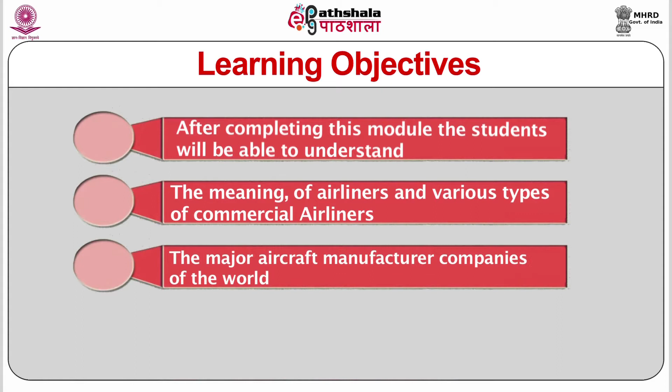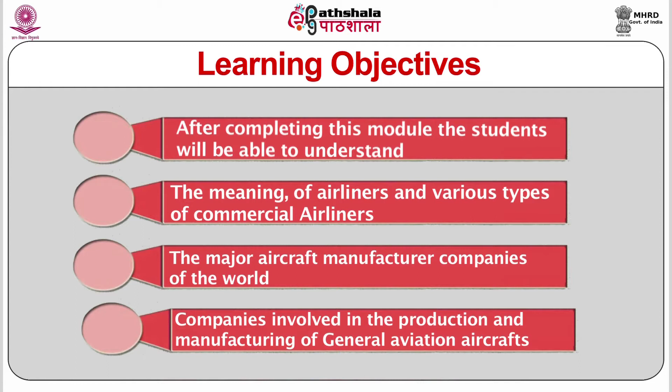Today we are going to discuss the module Major Aircraft Manufacturers under the paper Aviation Industry, Ticketing and Frontier Formalities. After completing this module, students will be able to understand the meaning of airliners and various types of commercial airliners. They will also understand the major aircraft manufacturer companies of the world, and come to know about companies involved in the production and manufacturing of general aviation aircrafts.

Dear students, with the advancement of technology and safety concerns, the design and making of aircrafts or airplanes have also been advanced. These changes may be because of changing aspirations and needs of customers, safety and security concerns, global competition, ever-changing technological landscape, or sustainability of individual airlines, which collectively contributed to the overall advancement of aircrafts in the aviation industry.

The present module will discuss and focus on the meaning and various types of airliners, different types of aircrafts, and the major aircraft manufacturer companies of the world. The module shall also briefly discuss the various companies involved in the production and manufacturing of general aviation aircrafts.

Let us first discuss the airliners. The airliners may be defined as the aircrafts or airplanes used to transfer air passengers and cargo, mostly operated by airline companies. The definition may vary from one country to another, but typically an airliner is defined as an aircraft which intends to transfer or carry numerous passengers and cargo in commercial service operated by an airline company. Let us now discuss the different types of airliners.

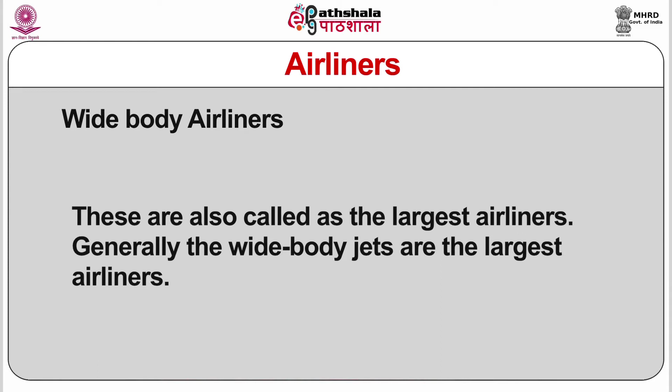There are 4 different types of airliners. The first is the wide body airliners, also called the largest airliners. Generally, wide body jets are the largest airliners. They are commonly called twin aisle aircrafts because they have 2 separate aisles running from the front to the back side of the passenger cabin.

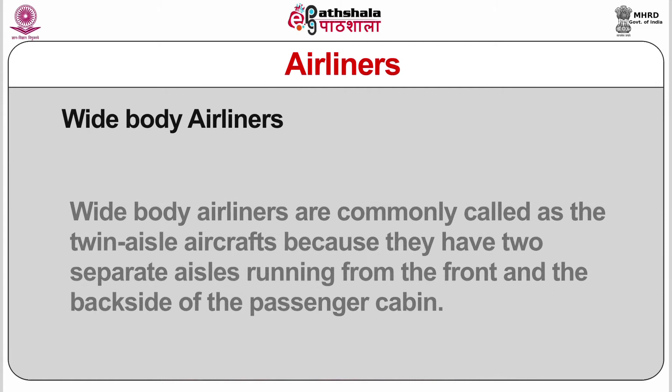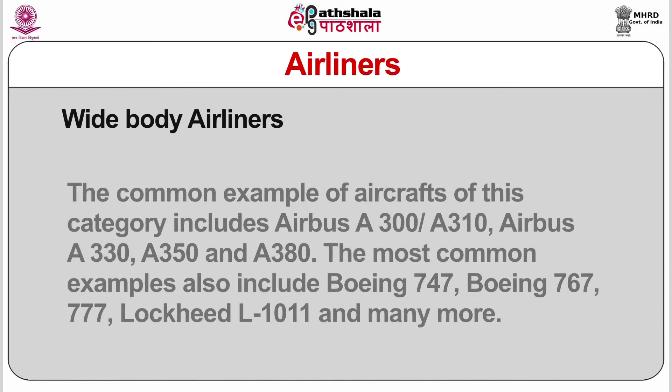Common examples of aircrafts in this category include Airbus A300, A310, Airbus A330, Airbus 350 and Airbus A380, along with Boeing 747, Boeing 767, 777, Lockheed L1011 and many more. Such aircrafts fly from major cities and are generally used for long haul flights where the time and distance of the flight is very long.

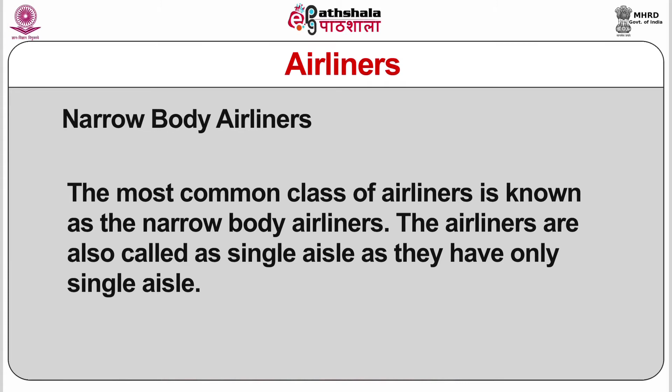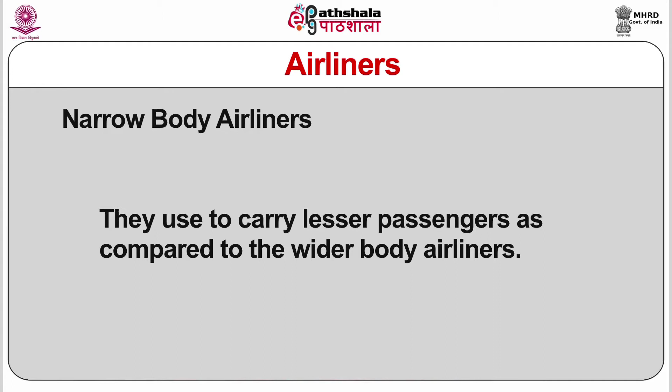The second one is the narrow body airliners, the most common class of airliners. These are also called single aisle aircrafts as they have only a single aisle. Such aircrafts are generally used for medium haul or medium distance range flights and carry lesser passengers compared to wide body airliners.

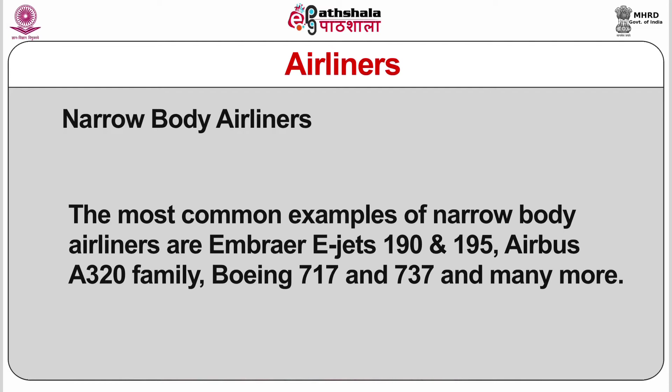Common examples of narrow body airliners are Embraer E-Jets 190 and 195, Airbus A320 family, Boeing 717 and Boeing 737 and many more. The future of narrow body airliners also embraces the Bombardier C series.

The next category is the regional, short haul and feeder line aircrafts. These may be defined as the non-mainline counterparts of the larger aircrafts operated by major airliners, to feed traffic into the larger airline hubs or cities. Such aircrafts have a lesser passenger capacity, maybe lesser than 100 passengers.

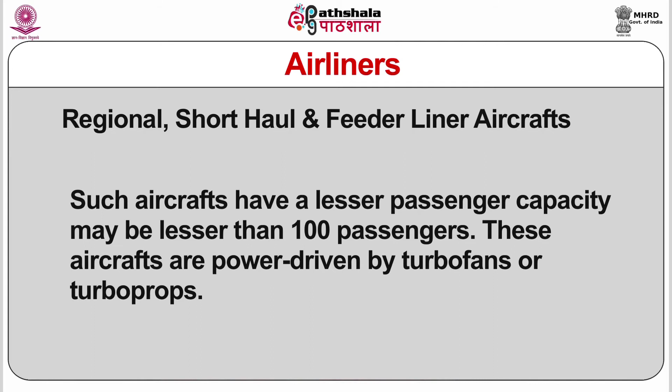These aircrafts are power driven by turbofans or turboprops, mainly used on particular routes to enhance frequency, need and service levels of consumers in the marketed product offered by larger airline companies. These feeder airliners are mostly contracted by larger airline carriers to provide services to passengers from smaller cities to the main hub or city and vice versa.

Sometimes the regional airliners are also painted in the liveries of the major airliners for which they are providing feeder services, in order to offer the market a smooth changeover between the smaller airlines and the larger airline. Some aircrafts used in this class are Bombardier CRJ and Embraer ERJ jets along with Bombardier Q-8 series.

The fourth category is commuter liners, used by regional airlines and air taxi operators. Commuter aircrafts are the lightest, used to carry maximum 19 or fewer passenger seats, and are called commuter or feeder aircrafts, commuter liners or feeder liners, or sometimes air taxis.

These may vary from country to country depending upon the size of the engines, their marketing in a particular region of the world, and their seating capacity. Because of different regional and national directives or policies, a commuter aircraft may not be able to qualify as an airliner in some countries.

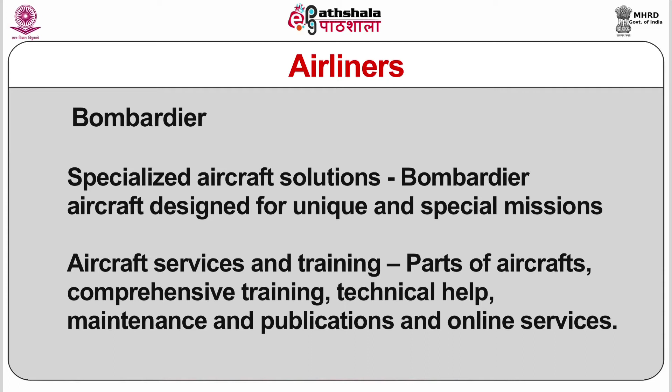The next one is jet travel solutions, which includes FlexJet. Then there is specialized aircraft solutions, which includes Bombardier aircraft designed for unique and special missions. The next one is aircraft services and training, which includes parts of aircrafts, comprehensive training, technical help, maintenance and publications and online services. Dear students, let us now discuss about Airbus.

Airbus was founded on 18 December 1970 by the name Airbus Industrie, and later in the year 2001 the name was changed to Airbus SAS. The founders of Airbus were Roger Béteille, Felix Kracht, Henri Ziegler and Franz Josef Strauss. The company is headquartered in the Blagnac region of France.

Airbus is a global company having worldwide operations and providing services related to manufacturing commercial airliners to most regions of the world. The parent company is Airbus Group, and the other subsidiaries are Airbus Corporate Jets, Airbus Operations SAS, Airbus ProSky and Stelia Aerospace. The company manufactures and produces mostly in France, Germany, Spain, China, United Kingdom and the United States.

Airbus started as an association for the production of aerospace and was named Airbus Industrie. Total people employed in this company are around 72,817. In the year 1999 and 2000, connection between European defense and aerospace companies led to the setting up of a simplified joint stock company by the end of the year 2001.

The European Aeronautic Defense and Space Company bought it up with a share of 80% and BAE Systems with a share of 20%. But on 13th October 2006, BAE sold its share to the European Aeronautic Defense and Space Company because of the process of protracted sales.

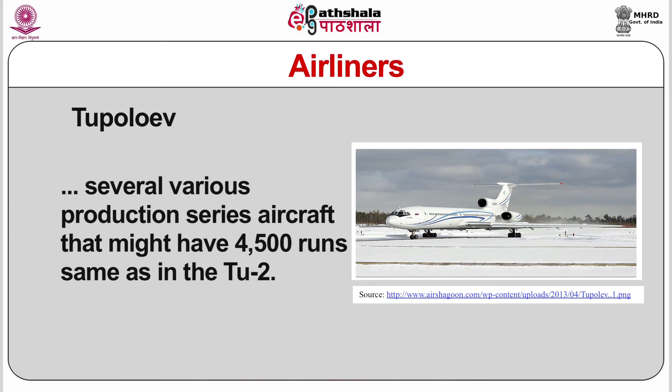Dear students, let us now discuss about Embraer. Ozires Silva founded Embraer on 19th August 1969. It mainly deals in the aerospace and defense sectors.

The company has several divisions, namely Embraer Defense and Security, Embraer Commercial Aviation, and Embraer Executive Jets. This company has become a main aircraft producer worldwide, focusing on particular market sections with favorable growth perspective in executive aviation, defense and commercial. The head office of Embraer is located in São José dos Campos, Brazil.

From the year 1996, more than 1,000 ERJs have been introduced by Embraer and delivered to more than 37 airlines from 24 different countries. There are three markets in which Embraer produced aircraft are used.

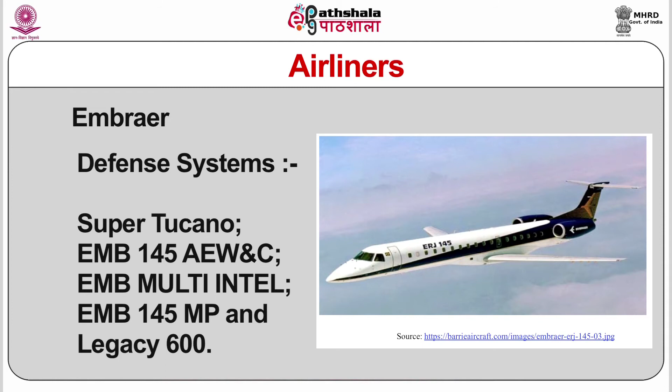The second category is defense systems, which includes Super Tucano EMB 145, AEW&C EMB Multi-Intel EMB 145 MP, and Legacy 600. The third category is executive aviation, which includes Lineage 1000, Legacy 600, Legacy 500, Legacy 450, Phenom 300 and Phenom 100 aircrafts.

Students, let us now discuss about Boeing. Boeing is an American-based public sector multinational corporation. It mainly deals in the aerospace and defense sectors. The founder of the company was William Boeing.

The company was founded on 15 July 1916 and was introduced as Pacific Aero Products Corporation, headquartered in Seattle, Washington, in the United States. The company is presently headquartered in the Chicago region of Illinois in the United States of America.

The company offers various other services like leasing and supporting solutions, and operates worldwide. The company has produced around 745 aircraft and 10 satellites till present.

In terms of products manufactured, the company has produced Boeing 737, Boeing 747, Boeing 767, Boeing 777, Boeing 787, Boeing FA-18E Super Hornet, Boeing CH-47 Chinook, and the Boeing 702 satellite family.

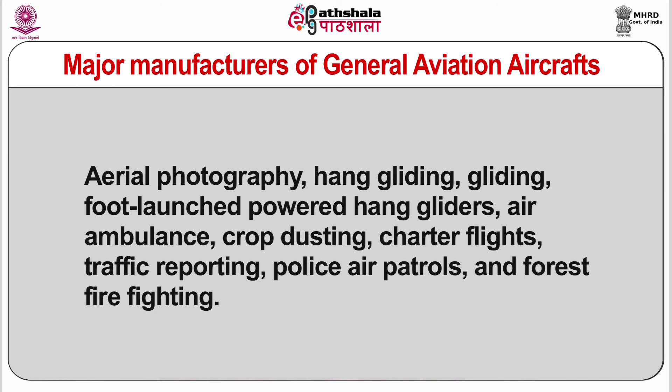The following small aircraft manufacturers are among a number of other manufacturers that serve the general aviation market, with a focus on private aviation and flight training.

The first one is the Cessna, the second one is Cirrus Design, the third one is the Diamond, then there is the Mooney, and the last one is the Piper.

Let us discuss the Cessna first. Students, the Cessna Aircraft Company is the leading designer and manufacturer of light and mid-size business jets, utility turboprops, and single-engine aircraft.

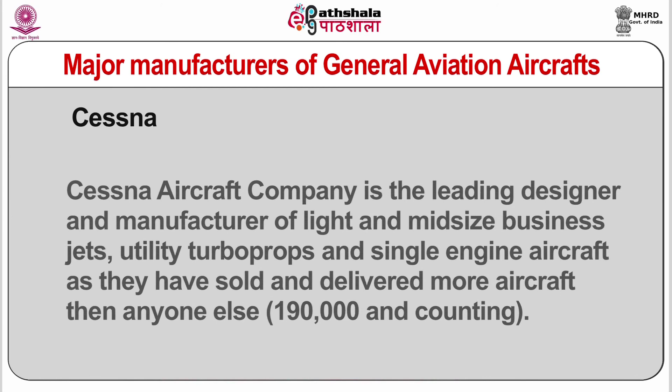They have sold and delivered more aircraft than anyone else. They started more than 8 decades ago as a small aircraft company in Wichita, Kansas, USA, with an aim to build a monoplane.

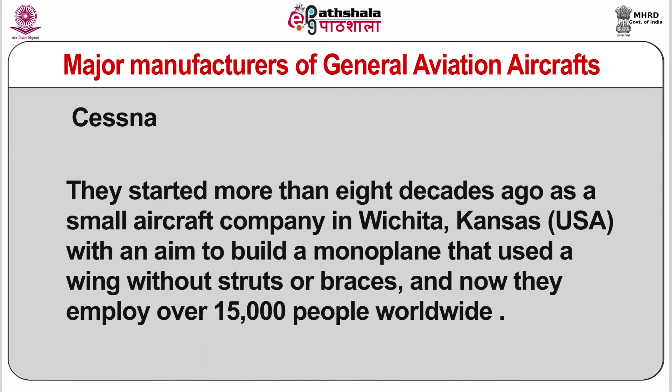The monoplane used a wing without struts or braces, and now they employ over 15,000 people worldwide. The company is a subsidiary of the United States conglomerate Textron.

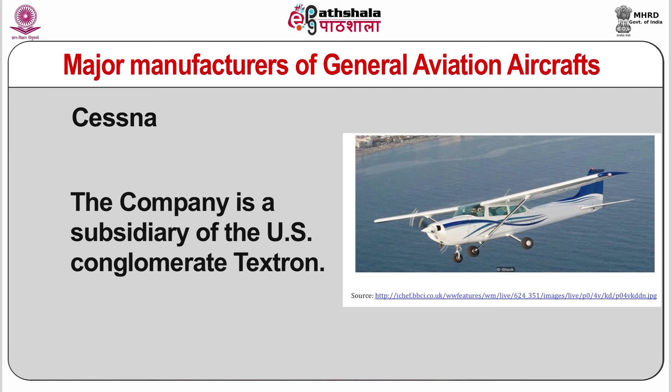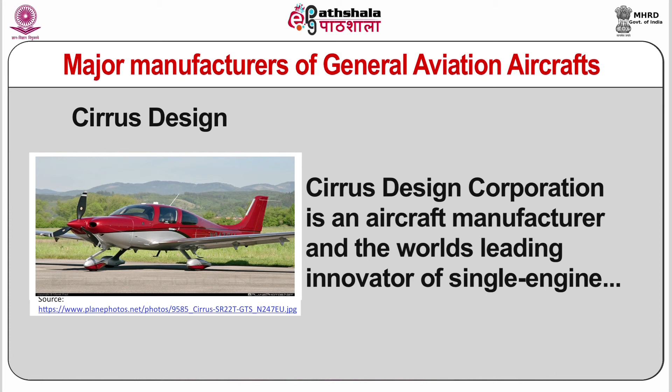The second one is Cirrus Design. Cirrus Design Corporation is an aircraft manufacturer and the world's leading innovator of single-engine piston-powered aircraft, with their SR-22 being the world's best-selling airplane in its class.

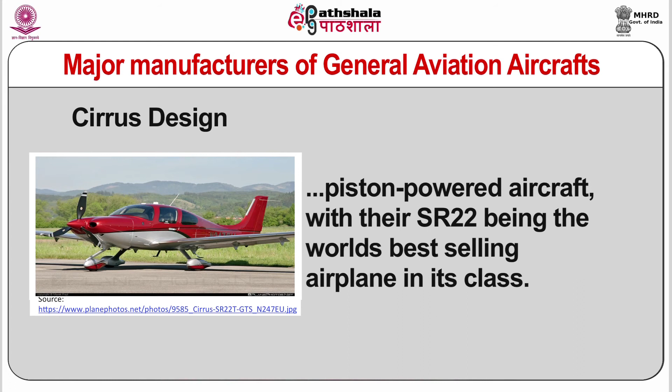They began their operation in the year 1984 as a kit airplane and design manufacturing company in Wisconsin, United States, with their VK-30 aircraft.

Before moving their headquarters in 1994 to Minnesota, United States, to begin research and development of the SR-20, a 4-passenger single-engine composite aircraft, with the help of over 950 employees.

Since they have started, they have also manufactured the fuselage, wings, and tail section of the Tactical Unmanned Aerial Vehicle, or TUAV, for the US Department of Defense, using composite technology in all 3 components.

Cirrus have also developed the SRV, SR20 and SR22 to incorporate flat panel, multifunction display technology and state-of-the-art safety innovations, including a final level of protection known as the Cirrus Airframe Parachute System.

This is a ballistic parachute deployed from the back of the aircraft in most cases, which allows the entire aircraft to descend safely from an emergency.

The third one is the Diamond. Diamond Aircraft Industries is an Austrian-based manufacturer of general aviation aircraft, motor gliders and simulators.

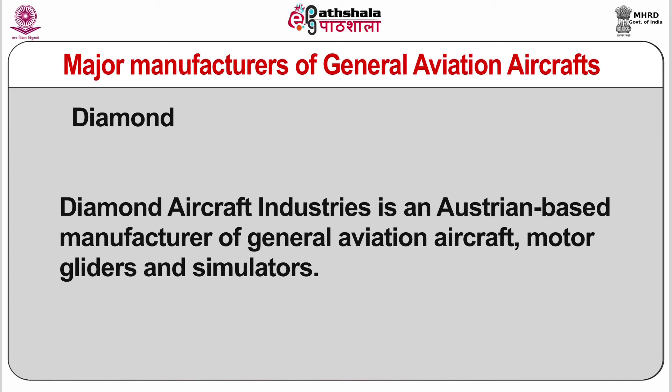They are a global manufacturer with offices in North America, Europe, Asia and Australia, employing around 1,200 people and producing over 3,500 aircraft. There are two production facilities, one located in Austria, which is the head office for research and development operations.

And one in Canada. At both of these facilities, they produce aircraft for flight schools and for private operators.

The fourth aircraft manufacturer of general aviation is Mooney. The Mooney Airplane Company, abbreviated as MAC, is a United States manufacturer of single-engine general aviation aircraft, founded in the year 1929.

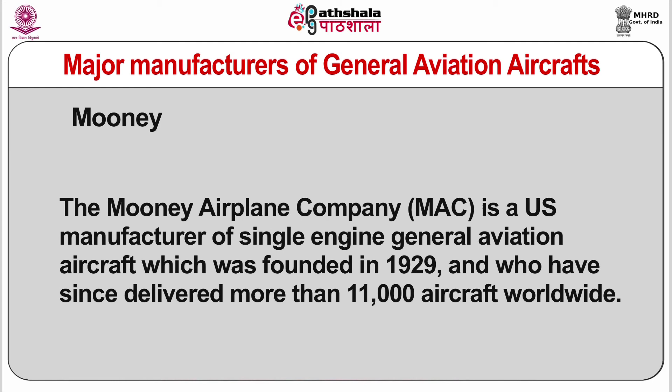They have since delivered more than 11,000 aircraft worldwide. The headquarters are located in Kerrville, Texas.

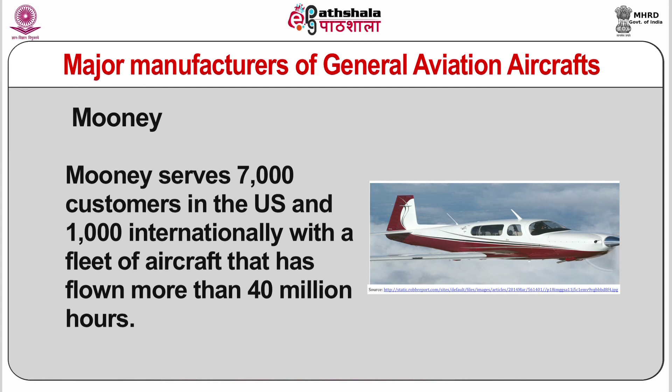Mooney serves 7,000 customers in the US and 1,000 internationally, with a fleet of aircraft that has flown more than 40 million hours. During their involvement in the aviation industry so far, Mooney has accumulated a number of significant achievements.

Including producing the first pressurized single-engine piston-powered aircraft, and the production of the fastest single-engine aircraft, the Mooney Acclaim.

It was the first production aircraft to achieve 200 miles per hour, and also achieved the fastest transcontinental flight in a single-engine piston-powered aircraft.

All Mooney aircraft have the signature vertical stabilizer with its vertical leading edge and swept trailing edge that gives the illusion of being forward swept.

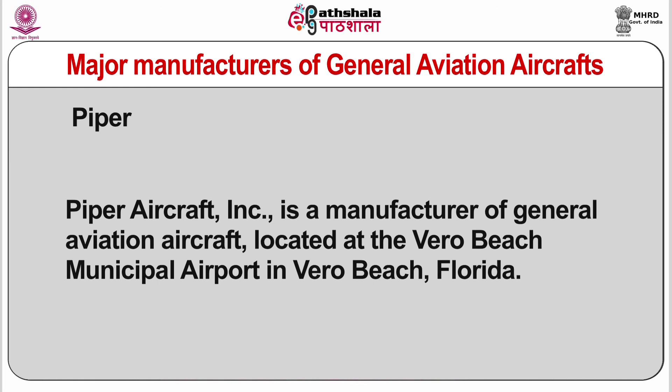Dear students, the next one and the last one is the Piper. Piper Aircraft is a manufacturer of general aviation aircraft located at the Vero Beach Municipal Airport in Vero Beach, Florida.

Mr. Piper introduced the Piper Cub in 1937, and since then Piper Aircraft have become the only general aviation manufacturer to offer a complete line of aircraft, from rugged trainers to high-performance turboprops, and the new Piper jet.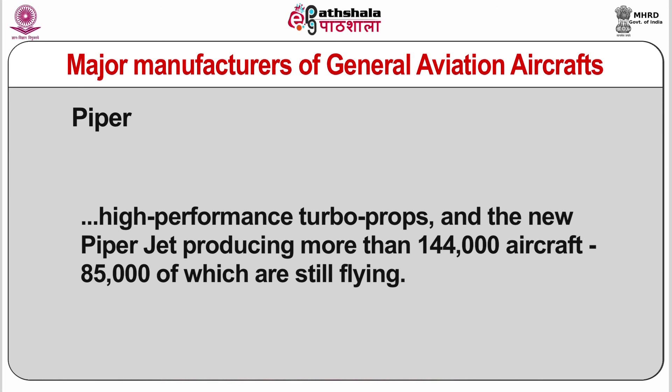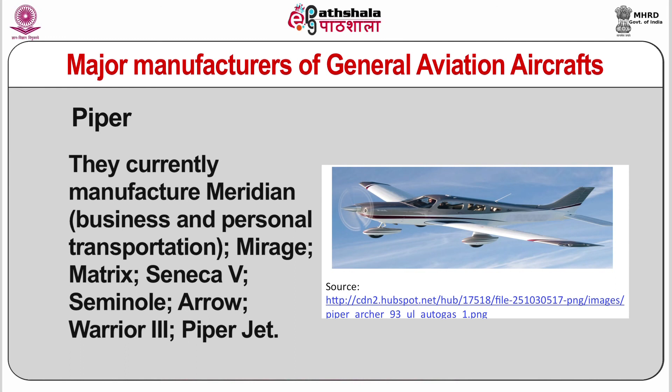Producing more than 144,000 aircraft, 85,000 of which are still flying. They currently manufacture the Meridian for business and personal transportation, Mirage, Matrix, Seneca V, Seminole, Arrow, Warrior 3 and Piper jets.

Dear students, let us now summarize what we have discussed in this module. Since the inception of air travel, the aviation industry has shown a remarkable growth.

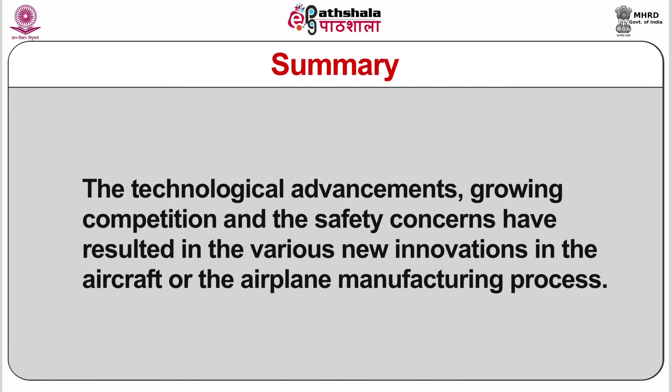Technological advancements, growing competition, and safety concerns have resulted in various new innovations in the aircraft or airplane manufacturing process.

Because of the changing landscape and introduction of new competitors in the market, airline companies have been forced to provide passengers with an unmatchable flying experience.

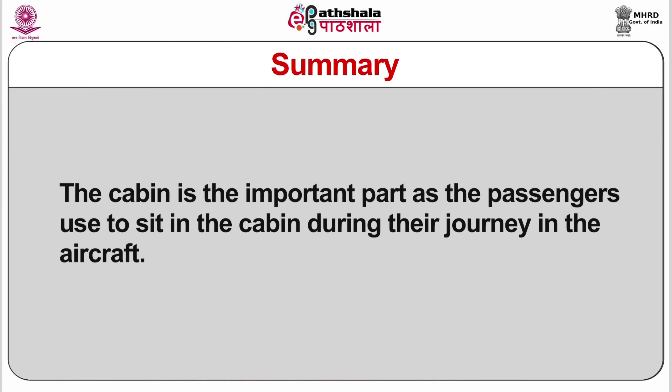The cabin is an important part, as passengers sit in the cabin during their journey in the aircraft. The cabin experience of passengers, in terms of services and amenities provided by the airline companies, matters greatly.

This makes an image of the airline in the passengers' minds, and this perception is sometimes shared with fellow colleagues, friends and relatives, which can generate word-of-mouth praise for the airline carriers and companies.

With these words, I sum up this module. Thank you.